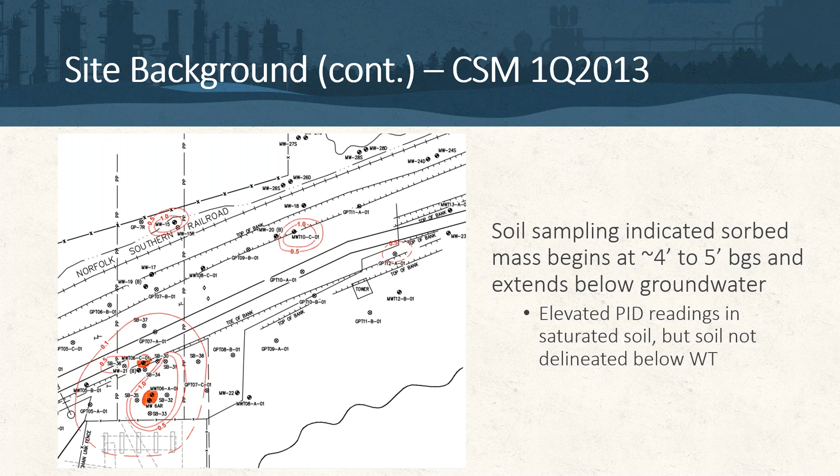This was indicated through the use of PID readings in the saturated soil, but as is similar to some sampling protocols in different regions of the U.S. and abroad, sampling of saturated soil below the water table was not directed or is not accepted protocol in some instances for compliance testing. The groundwater model, however, is a little bit different than the soil models we can see here based on the more extensive sampling involved.

We do have an elongated plume looking specifically on the project facility, which is located, one second, get my pointer here. So we got the laser pointer on the screen. This is the transmission facility here on the bottom left-hand corner of the graphical figure that we see. The release within that stopple fitting occurred within this transfer rack here, or metering rack located within the facility. This is the fence line demarcating the edge of that meter station itself.

We do have LNAPL extensive on-site within the source area here. That material spilled and discharged down along this perennial stream directly adjacent to the railway. And we have essentially persistent LNAPL located within that overburden area within the source with low-level dissolved phase, as we indicated before, that the overburden and the shallow bedrock were in fact connected hydraulically.

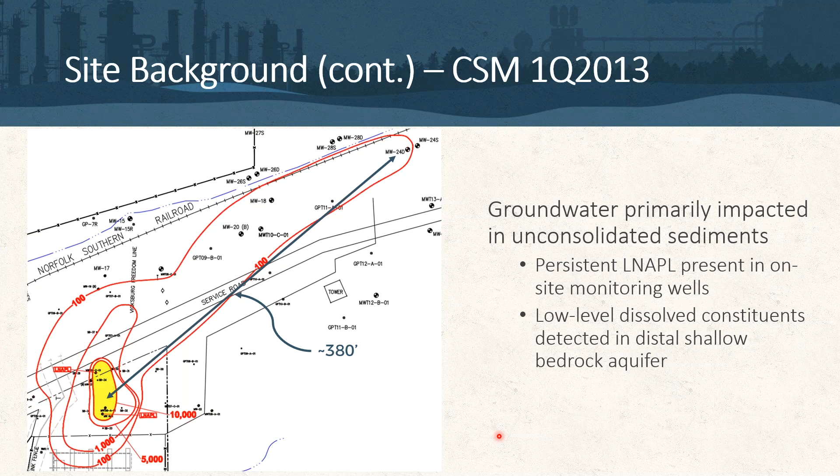If we look at this map here, this monitoring well 24D, located about 380 foot down gradient, is actually located within that shallow bedrock aquifer. And there were some low-level impacts of hydrocarbons within that zone.

So at the time that AST became involved, some remedial objectives that we were working with both MDEQ and our client, as well as the RP involved here, were set forth at the initial stages of review and evaluation. No soil goal was specified at the time of initial consultation, however, they did want to see a significant reduction in the groundwater contaminants of concern, as well as an elimination of measurable NAPL within that source area located directly down gradient from the actual meter station itself.

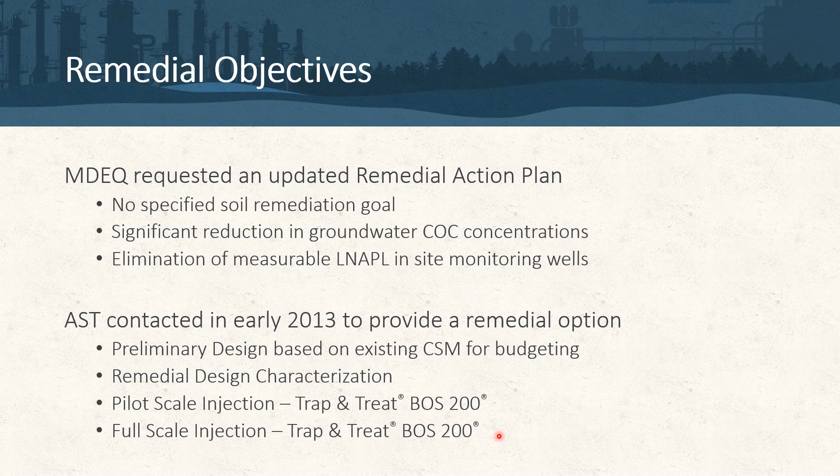We were contacted in early 2013 to provide a remedial option, and that consisted of a preliminary injection design based on the existing CSM, which we just saw above, for budgeting purposes. Through the identification of data gaps, we came up with remedial design characterization to get some additional sampling to fill that in. We'll talk about that shortly. And for the preliminary budgeting for the remediation, a pilot scale injection using BOS 200 and follow up with a full scale injection to manage the additional masses outside of that pilot area.

And so if you've seen presentations by AST and RPI, you've no doubt seen this roadmap here to success, which is just generically called the approach. And essentially what we're going through here is a process of walking through the stages of initial review, data gap filling through the RDC, where we try and get some higher resolution and better indications of distribution of mass and quantification, coming back to the table and looking at that conceptual site model and refining it based upon that data, and then actually going out into the field and implementing whatever technology is applicable to that specific site and contaminant stream that we're trying to deal with.

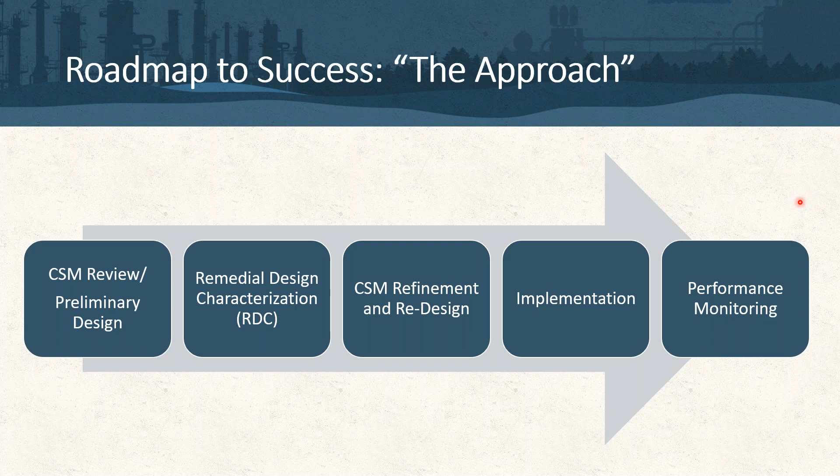And then, of course, at the end, we don't just walk away. We want to monitor it and make sure that what we expect to see is actually occurring, and if there's any adjustments that need to be made as we walk through the evaluation and monitoring of the site over time.

So talking about the technologies involved here, I mentioned earlier that we were targeting this site at the time to utilize BOS 200. The Trap and Treat products obviously include some other materials that are geared towards different contaminants based on what site you're dealing with. This site at the time of assessment and implementation was during the early stages prior to BOS 200 Plus being introduced.

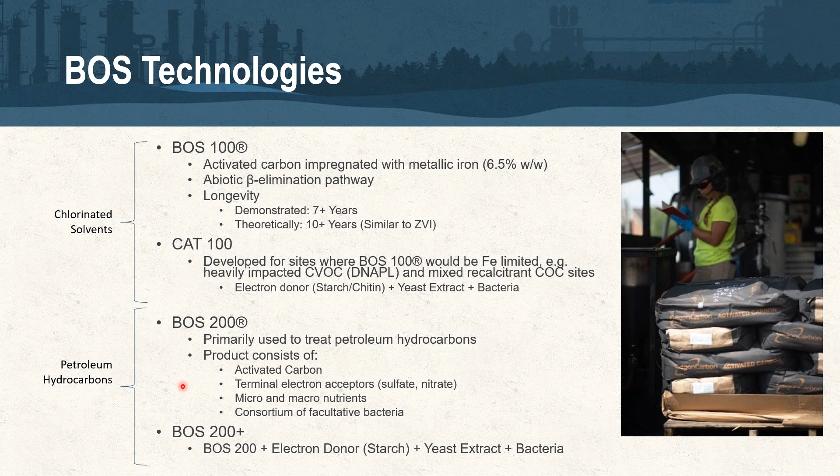And BOS 200, if you're not familiar with that, is a powdered activated carbon for petroleum hydrocarbons remediation. And that powdered activated carbon is mixed with terminal electron acceptors in the form typically of sulfate and nitrate. We add some macro and micronutrients to that, and then add a facultative blend consortium of bacteria for the purpose of regenerating that carbon in situ over time through biological degradation of that contaminant.

Those analyses included speciated VOC constituents, as well as looking at that total volatile hydrocarbon mass fraction to be able to look at the total mass present within the system. At each of those 34 soil borings, we also installed 34 nested well pairs in the completed borings. These are for discrete intervals looking at vertical delineation of that groundwater concentration with depth.

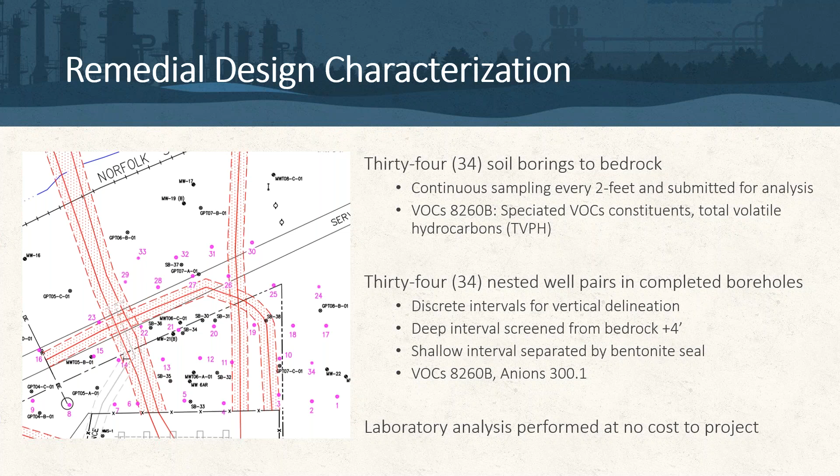There was a deep interval that was installed essentially from top of bedrock to about 4 feet above rock. And then we installed a shallow interval that was separated by a bentonite seal so that we could see if there was a concentration gradient across that vertical horizon. Those samples were also analyzed for VOCs, which included that TVPH as well as anions to look at background concentrations of those. And again, as I mentioned before, RPI provides this analysis free of charge for any project that we're involved in.

So the preliminary conceptual site model compared to the RDC data showed that there was an underestimation of treatment mass in that pilot scale area of about 20% shy of what we needed. So not very significant there, but when we actually looked at the second event on the full scale, the available data versus what we found from the RDC showed that we wouldn't have even come close to being able to address that contaminant mass present within the site. Very contaminated, highly contaminated site.

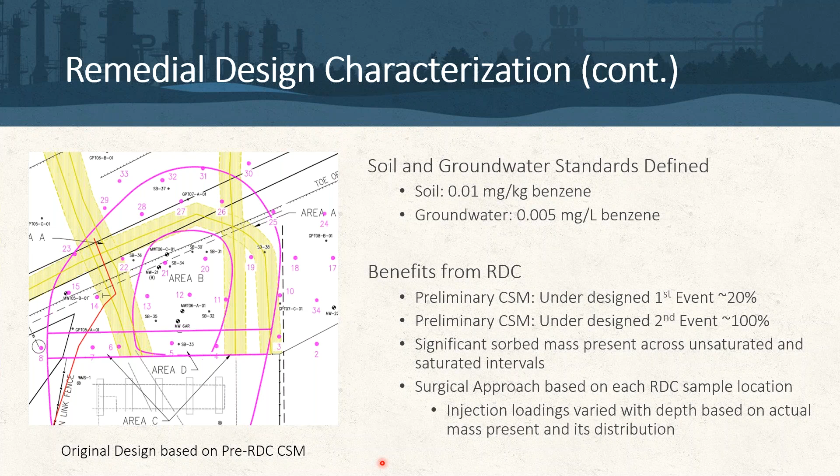There was significant sorbed mass that was present across the unsaturated and saturated intervals within that soil media, and that contribution to the actual total contaminant mass of the site was actually coming from that saturated zone within the soil zone. So that RDC also allowed us to come into play with a more surgical approach where we could vary the loadings of the BOS 200 with depth based on the actual mass located within a specific area and its distribution across that zone.

And so just to give you a little bit of example of some of the data that was obtained from the RDC, we're looking at 2 soil borings here initiated within the source area itself, RDC 11 and RDC 12. If you look at the plots here on the left and right, they're essentially mirrors of one another, the blue line being benzene, the orange line being TVPH from soil, the dots corresponding to the individual sample depth interval that we sampled from, water table depicted, and then you can see the bars on the left-hand side of each of these plots are showing the screened interval for the discrete interval samples that we put in on the nested well pair. So you see your shallow and deep zone.

And so again, as what we can see from the historical sampling, with your RDC 11 sample, you do have a fairly significant amount of mass just above the water table, and that's reflected by the groundwater sample that's shown from that shallow interval. But we can see in both of these, and it's very important to pull out, that there is significant contaminant mass that is actually below the water table. And when you're actually trying to quantify and define the amount of mass present at the site and how to address it, if you don't have this information, you're underestimating your total mass and likely your treatment interval that needs to be addressed.

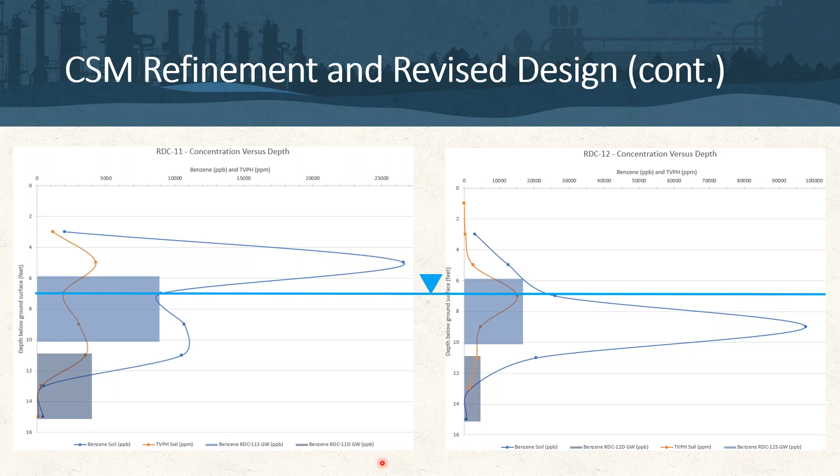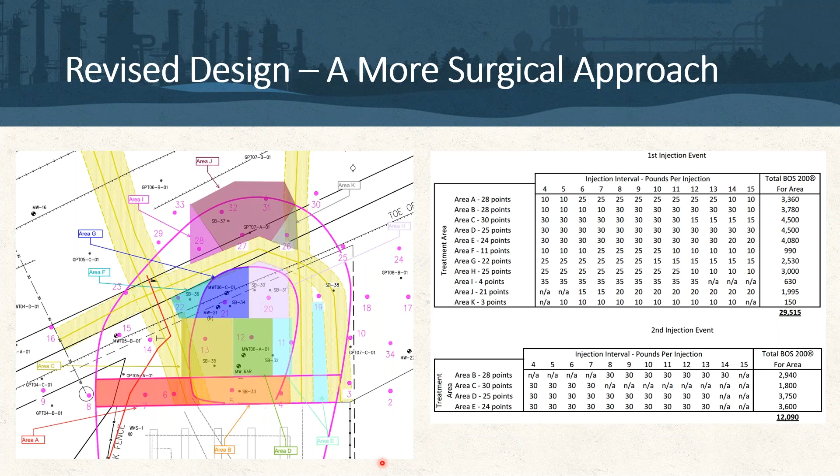As part of that preliminary or follow-up conceptual model and redesign, we've targeted the site for 2 injection events. However, we did deploy a 3rd injection event out here, which we'll show highlighted on a future slide. And so we also can't forget the importance of actually implementing the technology, right? So we have a great front-end investigation to identify and quantify contaminant mass. We have a very good picture of that distribution. But then the other thing we have is an excellent product that essentially is very powerful for removing mass from the system and treating that contaminant in place.

But then the other part of that that's very important is actually installing the material in the proper way. So, looking at installation of slurries, we're not pumping a solution in, we're not trying to occupy pore volume, we're actually installing a solid particle to become part of the aquifer matrix. And so these slurries are implemented under a high flow rate and relatively small injection volumes across each individual point. Our grid spacing out here was on a 5-foot grid spacing during the 1st and 2nd event. We went to as small as a 3-foot grid spacing on the 3rd injection event.

We place this material in the formation. We do that in a top-down manner where the path of least resistance is in the horizontal versus the vertical. And these are dedicated temporary points. And the other part to see here that's important is that we orient our injection point rows perpendicular to groundwater flow for the purpose of providing some level of intercept for seep coming out of that area of contamination.

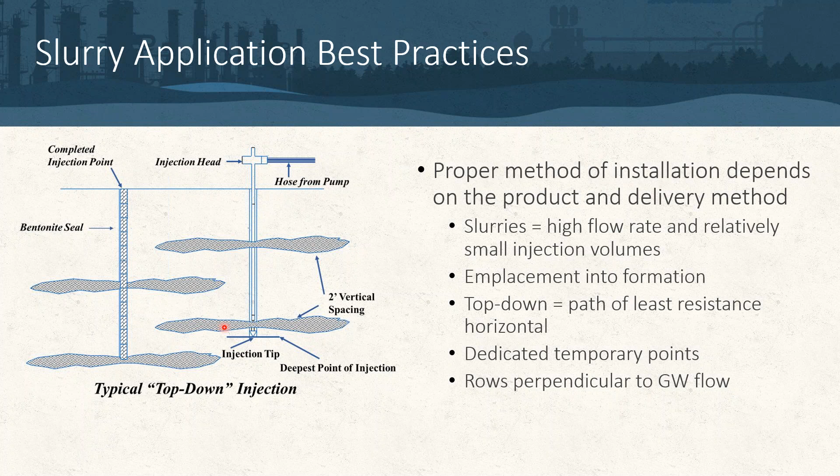And then finally, looking at the left-hand side, we can see from this injection method here, we've got a completed point here that's backfilled with bentonite to seal that borehole to prevent any sort of daylighting coming back or path of least resistance into that borehole. And adjacent points are going to be offset by roughly 1 foot so that we get an overlap of those intervals as we're moving left to right within this particular row. But if we're going into and out of the page on your screen, you can see this in 3 dimensions as well. So we get this 3-dimensional lattice work of interconnected zones of injection.

So following the 1st injection event, about 1 year after that, we came back to the site and did some limited soil sampling and investigation as a 2nd RDC. This was planned from day 1 to, first of all, look for the distribution of BOS 200 within the samples that we pulled. But the idea was also to get current data prior to going in on the 2nd event to establish a new baseline. So this was completed at about 12 key locations adjacent to the 2013 RDC that was completed prior to the 1st event. We did collect some groundwater sample grabs from those locations as well, just to see what the groundwater reflection of that soil mass was. And again, we looked for the presence of BOS 200.

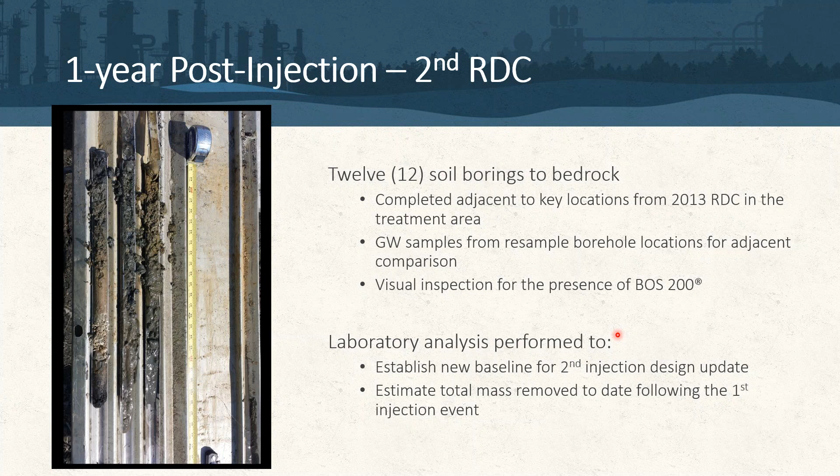And so looking at just that data set alone, we had reductions in soil of up to about 85% in benzene, as well as 68% reduction in TVPH in some areas, in some samples. Groundwater mass reductions, similarly, were around 73% for benzene, 88% reductions in TVPH.

The full-scale BOS 200 event was approved and implemented following this RDC in April 2016, and then a third event in the source area was also approved for coming back in August 2018 to further bolster the installation that had been done in 2014.

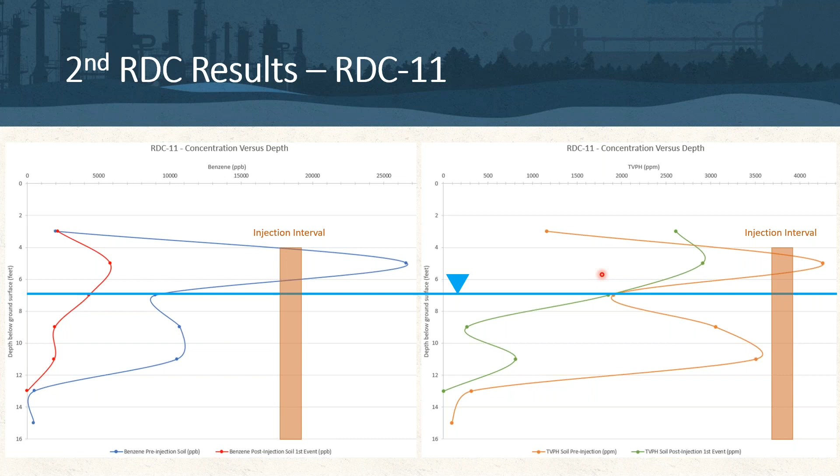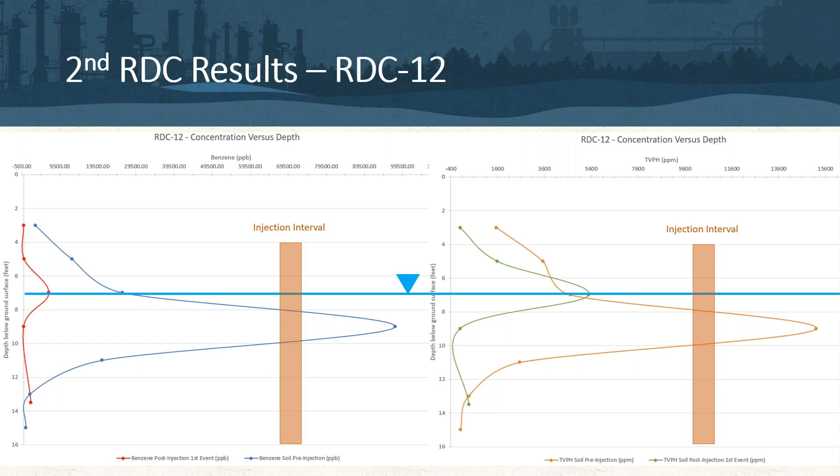Moving forward to RDC 12, which is adjacent to that on the same row of samples that we collected. Similar results here. The benzene data looks fantastic, looking at that high concentration mass of both TVPH and benzene below the water table. Again, no change above the injection interval. And looking at that TVPH, again, we got that kind of weird anomaly right there at the water table, just due to the sampling variability coming back and trying to replicate that sample.

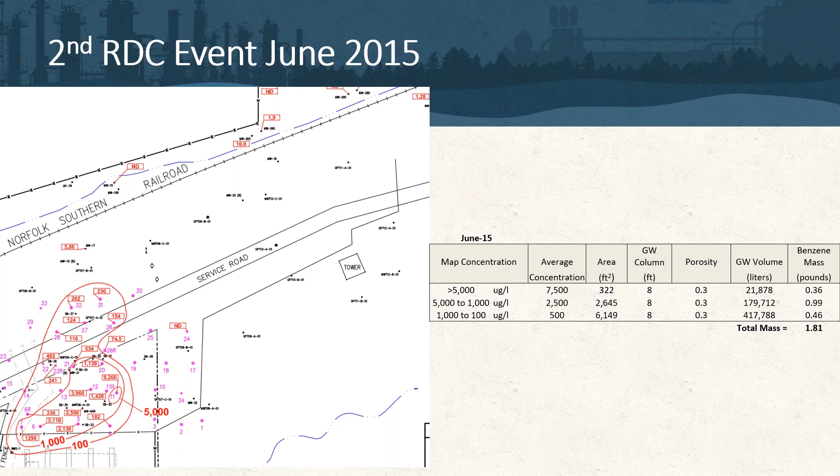So now we're about 11 months coming up on the 1-year mark post-injection. We can see the geometry of the plume and the orientation of the hot spots is reorienting itself just adjacent to the transmission facility itself. Looking at that sampling event in June 2015 when we performed the second RDC out here, again, we can see from the right-hand side, we're continuing to see knockdown in contaminant mass as things continue to stabilize.

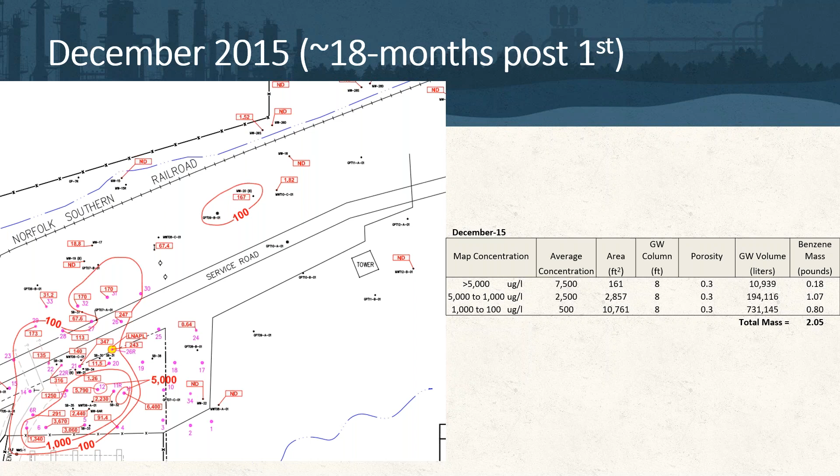Moving forward to about 1.5 years following the first injection event, a little bit of reorientation, some 100 ppb concentration showing up here as things reorient itself. But again, this was slated for multiple injection events, so it's going to reflect what we expect to see with things changing as we move forward with time.

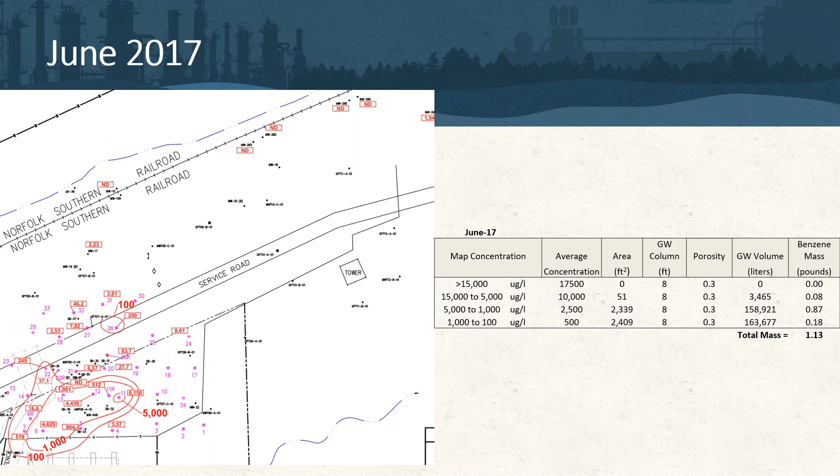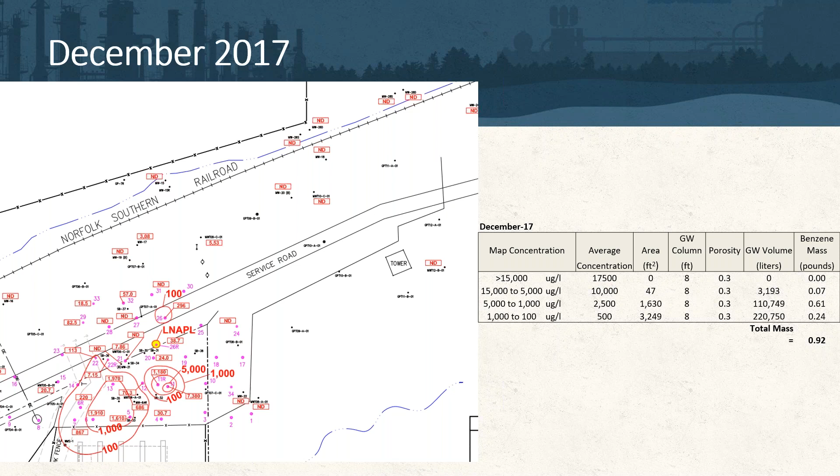Moving forward to June 2017, we do have a cyclical appearance of LNAPL at the site that typically shows up in the later months, November, December of the sampling years. So here we have that little blip of LNAPL showing up where the pipelines cross there in the MW-26R. Again, that mass on the right-hand side continuing to fall, continuing to decrease as we go with time.

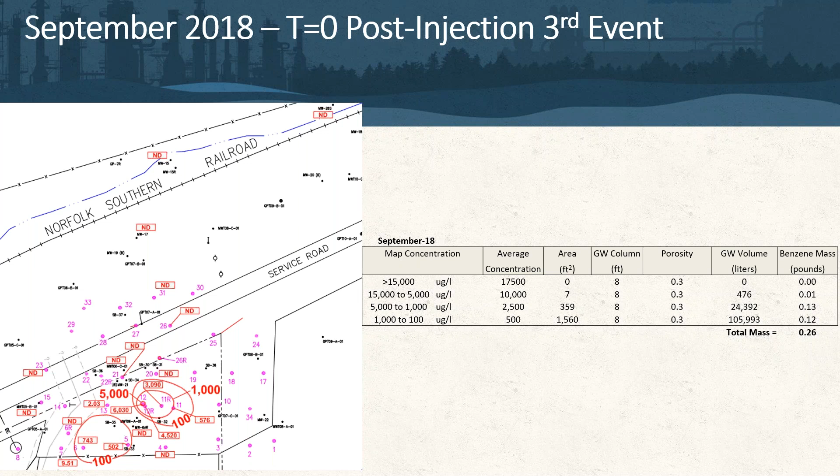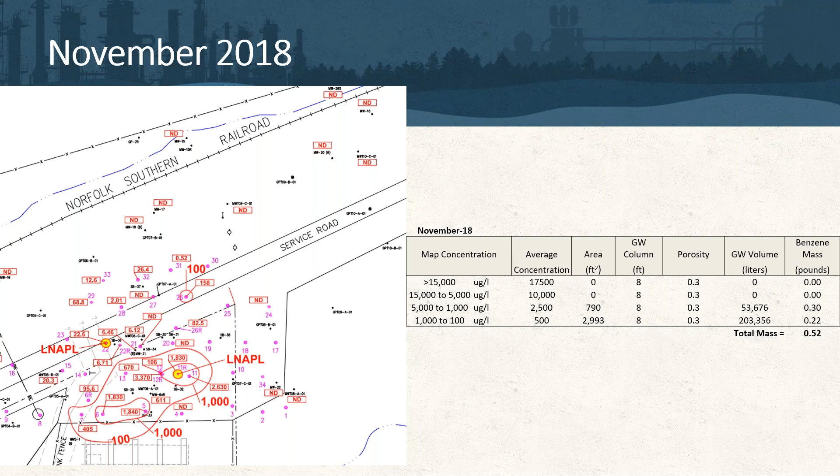Now we're right after the third event, post-injection. So we can see, really cool slide here, the power of that carbon adsorption and direct mass removal system. Everything is now sucked back in and located within the source area between the pipelines. See a little bit of readjustment getting into that fall area where we see that LNAPL wanting to pop up as just a minor sheen on some of these monitoring wells and nesting sets that we have out here.

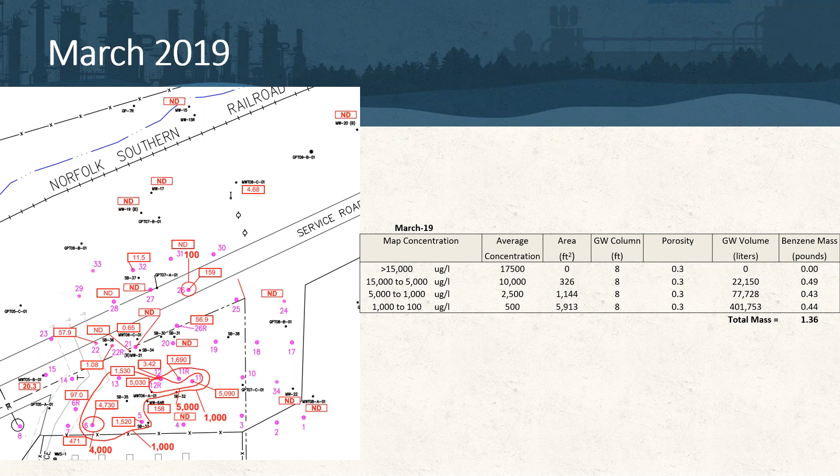March 2019, things have stabilized. Now we're at just some higher concentration zone located within that source area where 12R and 11 is located. Looking at June 2019, the decision has been made to decrease the sampling interval to semi-annual. Now looking at December 2019, again, just those little blips showing up in the sheen of LNAPL there, right where the pipelines are crossing and located.

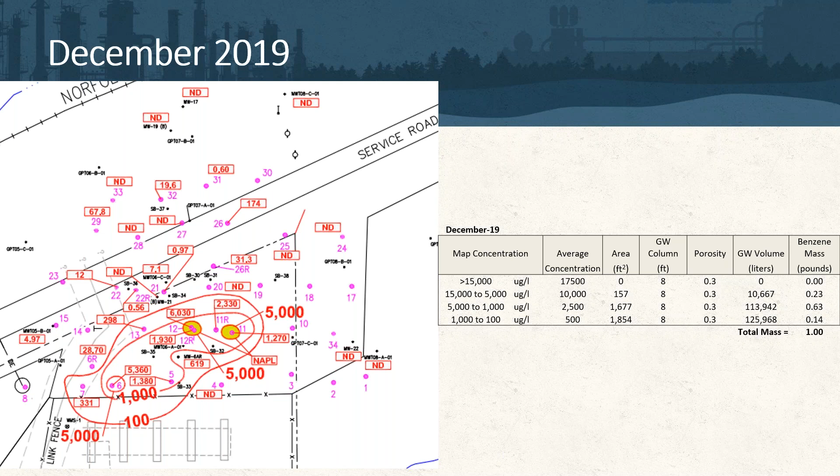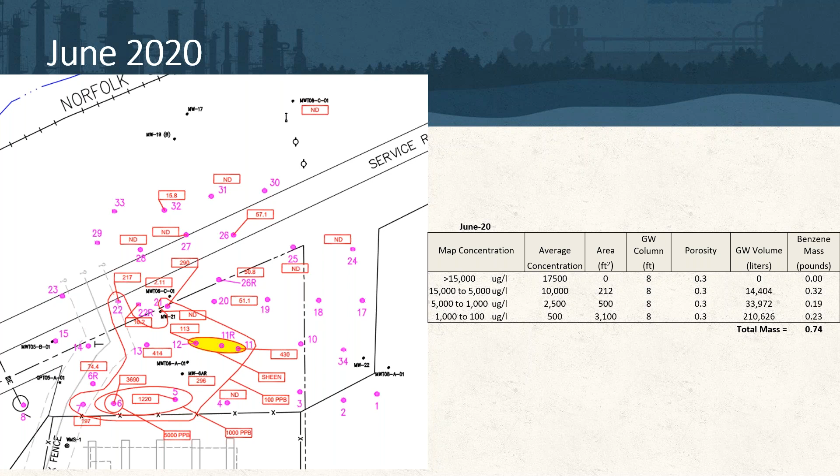Keep in mind, we can't inject around the pipeline, so we do have a sustained source both coming out of the meter station and out of the backfill around these pipelines that are leaving the facility that we have to manage with time. So again, that LNAPL is just located there on the right-hand side. It's just a minor sheen showing up intermittently from time to time.

And then looking at the final sampling event that's available to us as of right now, in December 2020 of last year, we can just see that everything is pretty much right into the property boundaries of the transmission facility itself. Again, we just see that little bit of sheen showing up right adjacent to that pipeline as it's coming out.

If you remember from earlier, you have a pipeline discharging here and another one discharging here in parallel, and they cross right here. So you kind of have a little bit of a hydraulic trap that I think is part of the reason we're seeing some of that contamination showing up regularly within that specific area.

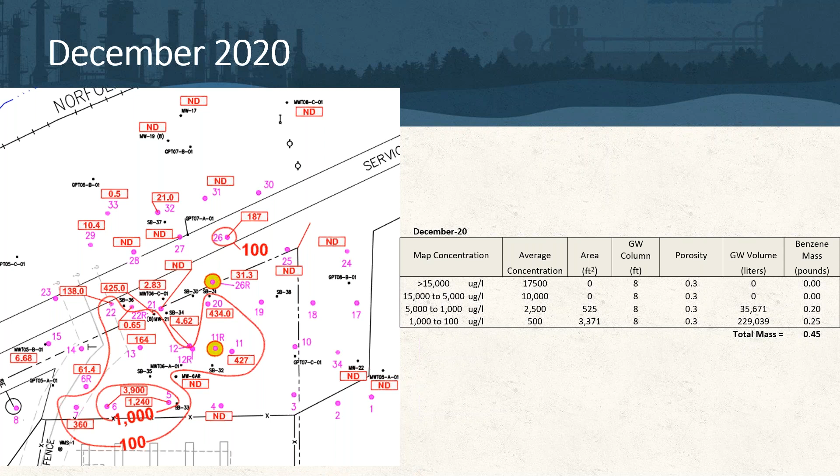And so now taking all of that information that I just presented to summarize for you, using the groundwater as the indication for managing that contaminant mass on that specific area of the site. Looking at an initial total mass in April 2014, looking at groundwater specifically, not including the soil component, about 5.9 pounds of benzene in April 2014 compared to 0.45 pounds of benzene in December 2020 during the last event, which equates to a roughly 92% total reduction in mass based on the groundwater data present.